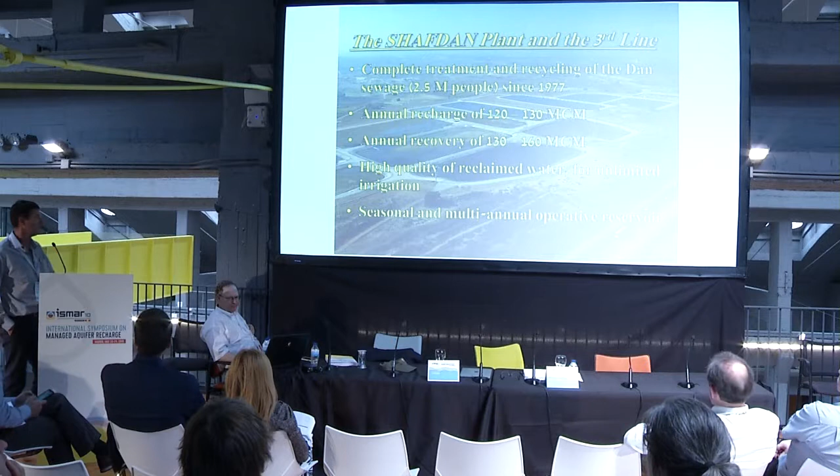We're talking about the Shafdan Plant, which is one of the biggest of its kind in the world, for soil aquifer treatment. For the last more than 40 years, it has delivered complete solutions for all the Dan region sewage, more than 2.5 million people, complete treatment and recycling of sewage, annual recharge of about 120 to 130 million cubic meters, annual recovery of 130 to 160 million cubic meters, a very high quality of reclaimed water for unlimited irrigation. And as we all know, the MAR advantage of a seasonal and multi-annual operative reservoir.

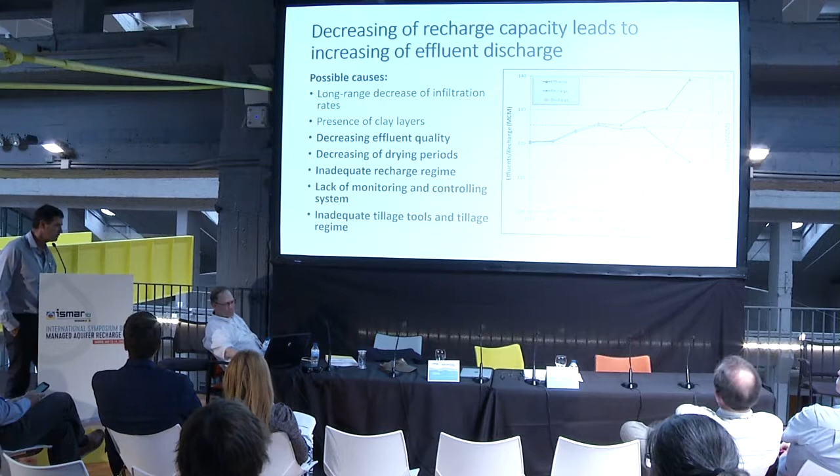I will talk about the tillage—inadequate tillage tools and tillage regime.

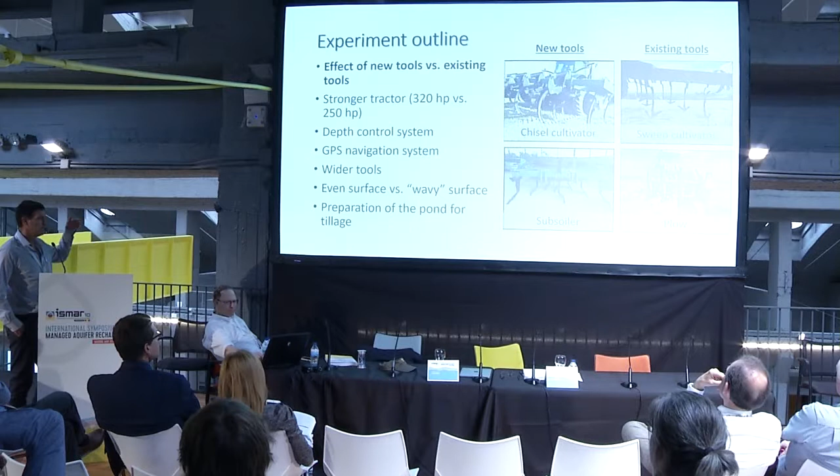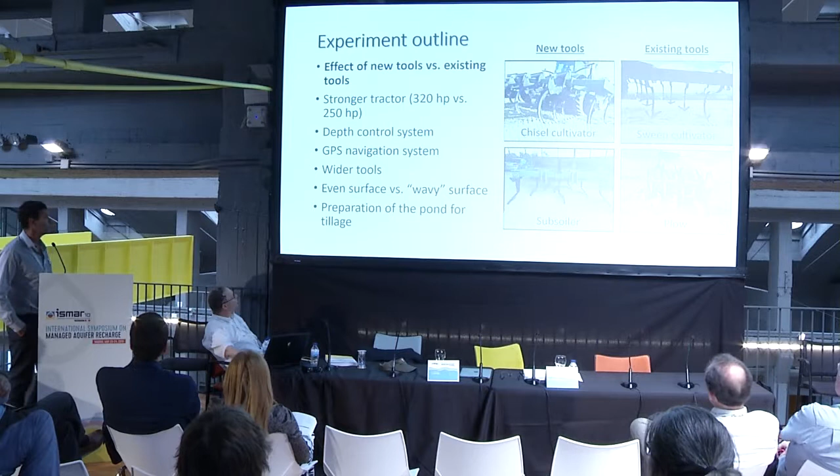We kept the same concept, but decided to change the tool. Instead of a sweep knife cultivator, we moved to a chisel knife cultivator, increasing the depth a bit, from 20 to 30 centimeters. And instead of a plow, we're working with a subsoiler. Besides this, we also decided to check the tractor, using a stronger tractor with control systems such as a depth control system and GPS navigation, and working with wider tools in order to minimize passes over the fields.

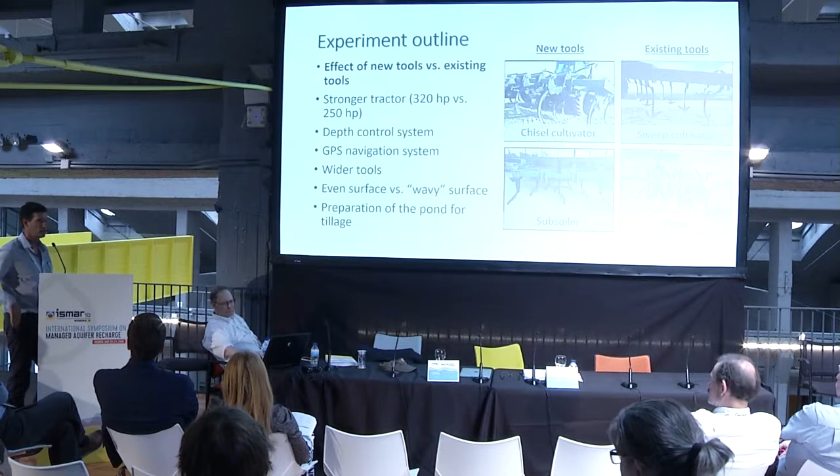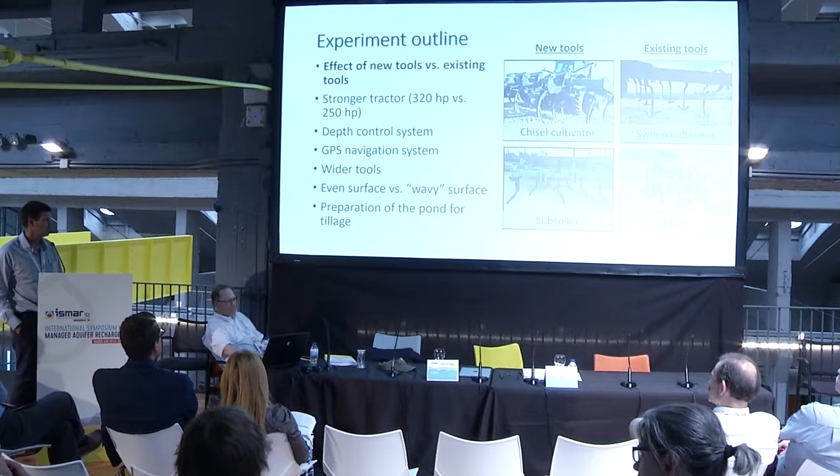One important question is even surface versus wavy surface. I know in many places the recommendation is that the surface of the ponds should be wavy in order to increase surface area, etc. There's an interesting answer to this question at the end. And I think one of the most important things is the right preparation of the ponds before tillage, meaning complete drying.

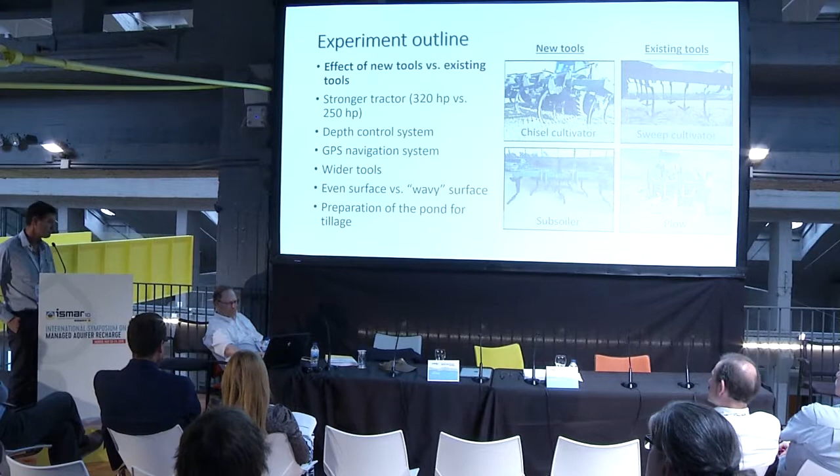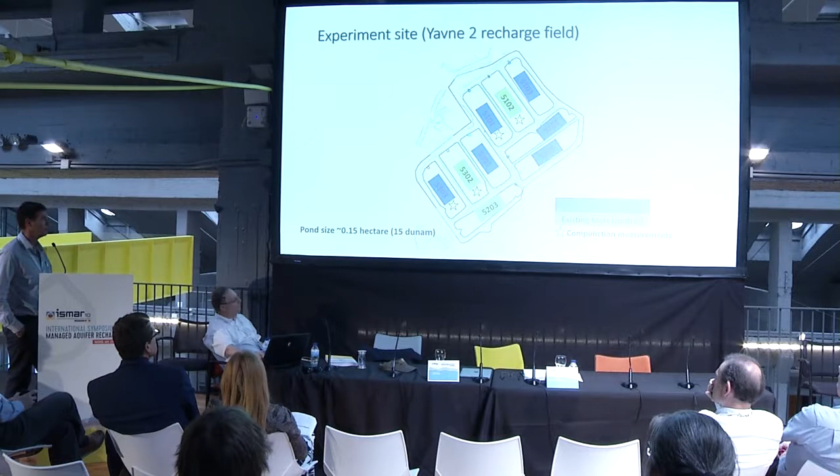In 4 of them—control and treatment—we also ran some soil compaction measurements.

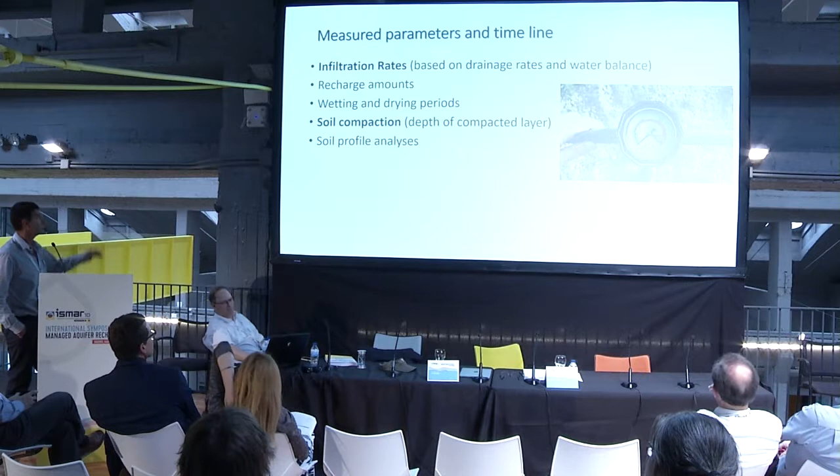These are the measured parameters during the experiments: infiltration rates using 2 different independent methods, recharge amounts, wetting and drying periods (all data that we collected), soil compaction—which is actually the depth of the compacted layer—and soil profile analysis. I bolded the parameters that I will have time to discuss now.

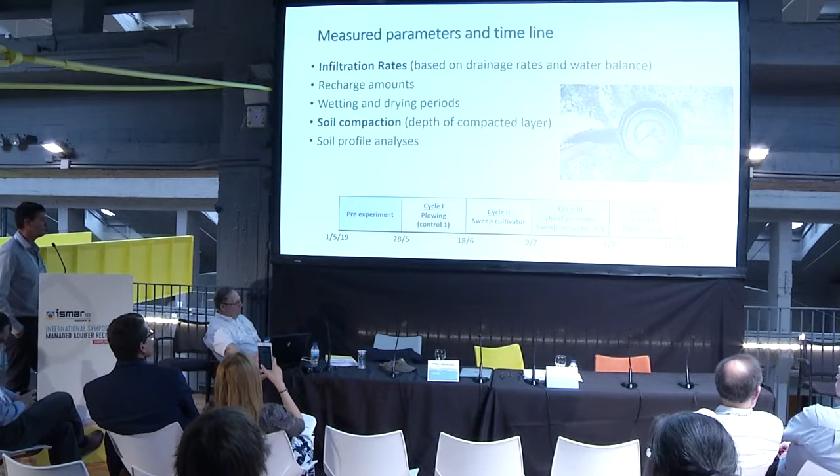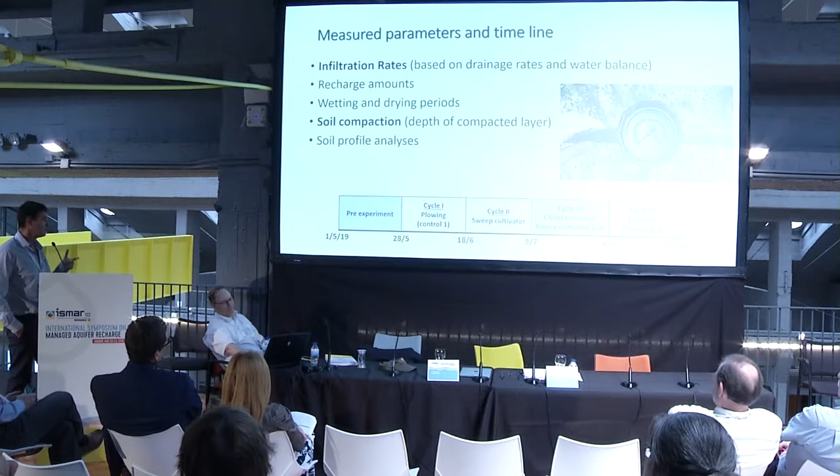The experiment is divided into 4 main cycles with a pre-experiment cycle. It started at the end of May and ended in September, so it's a summer experiment. The first and second cycles are cycles where we used the existing tools—the plowing and the cultivator.

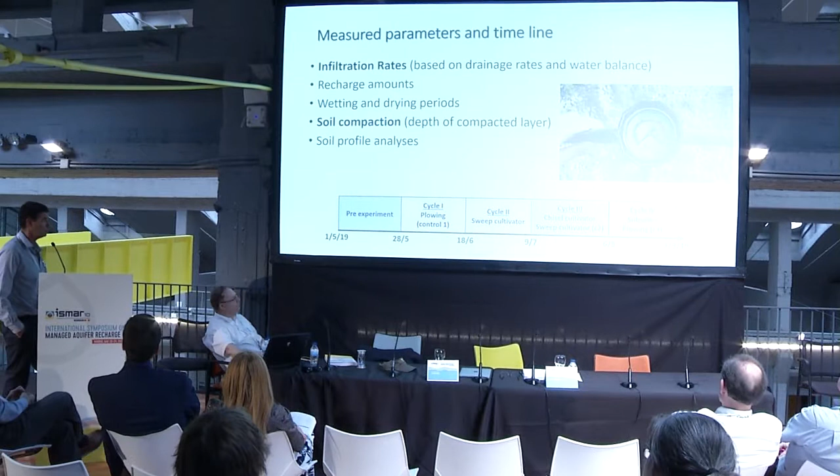And then the next 2 cycles are the ones that we compare between the new tools and the existing tools: first, the chisel cultivator versus the sweep cultivators, and then the subsoilers versus the plowing. We also have a pre-experiment cycle at the beginning of May, where they plow all these ponds without any special instruction from us, just routinely.

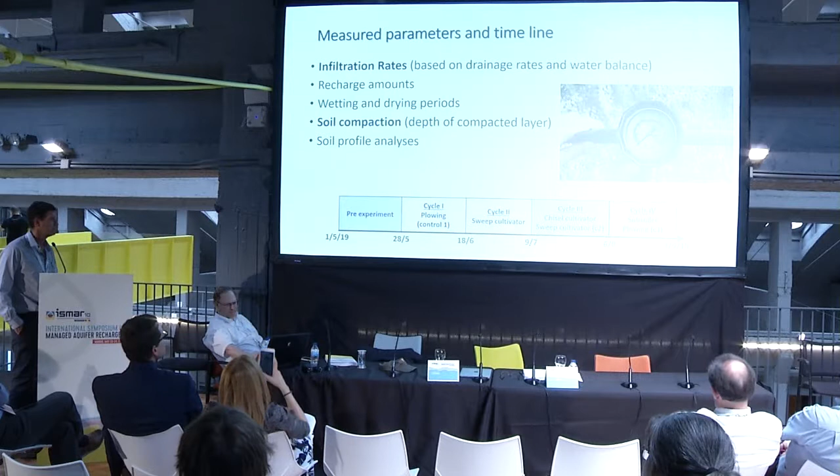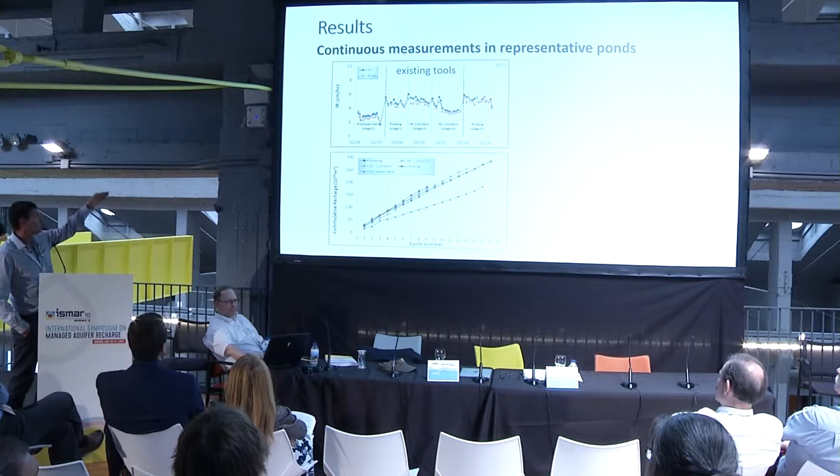So we can also refer to this cycle. These are continuous measurements in representative ponds. I'll just demonstrate the result in 2 ponds for you. One of them is the existing tool, which is the control. What you see is after the pre-treatment season, when we start the experiment with proper preparation of the field.

The plowing dramatically increased the infiltration rates, and then the existing cultivator kept the same infiltration rate. In the second cycle of the cultivator, after about 3 weeks, we see some reduction in infiltration rates, and then another plowing managed to recover the infiltration rates to about the same size as when we started the experiment. On the bottom, you see the amount of the recharge and the rate, which is accumulated.

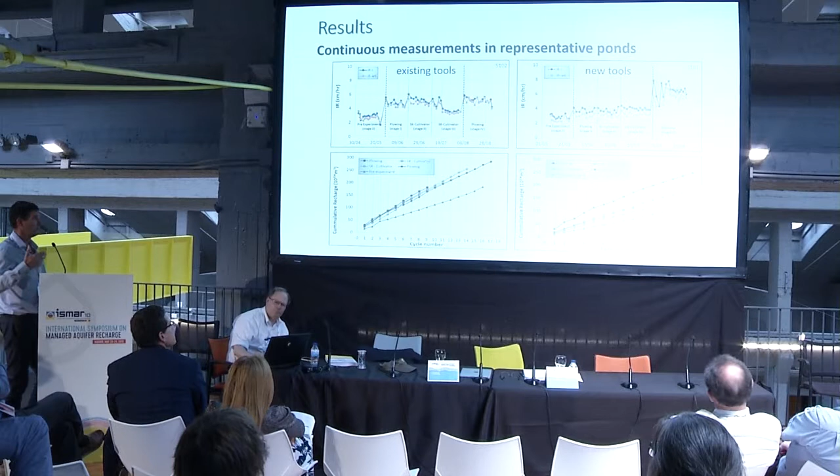Now let's compare it to the effect of the new tools. First of all, the first 3 cycles are about the same because we're using actually the same tools. The differences started in the 3rd cycle, where you see the chisel knife cultivator managed to even increase infiltration rates compared to before—definitely not decrease it like the control ponds.

And the joker is the subsoiler, which dramatically increased the infiltration rates, and you see it also in the rate of the accumulated recharge amount.

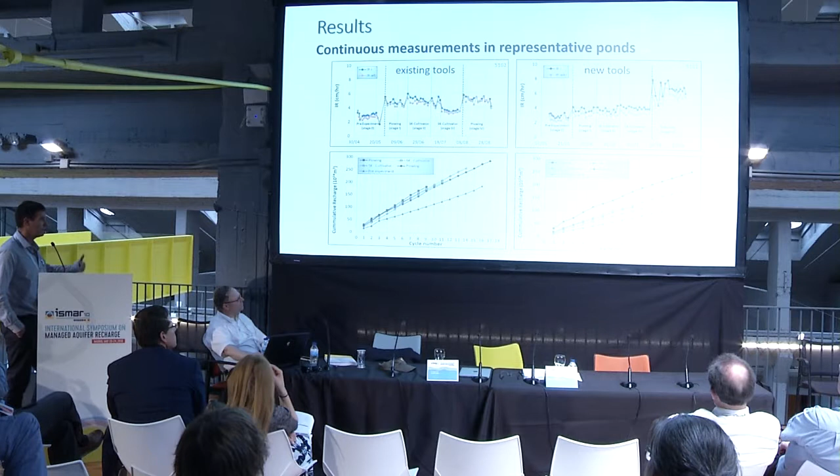In order to summarize all our replicates together, we calculate the relative change in infiltration rate relative to the first plowing. Then we calculate the average, because of environmental variability not all of them act the same. You see the first plowing, of course, is 1 because this is the reference.

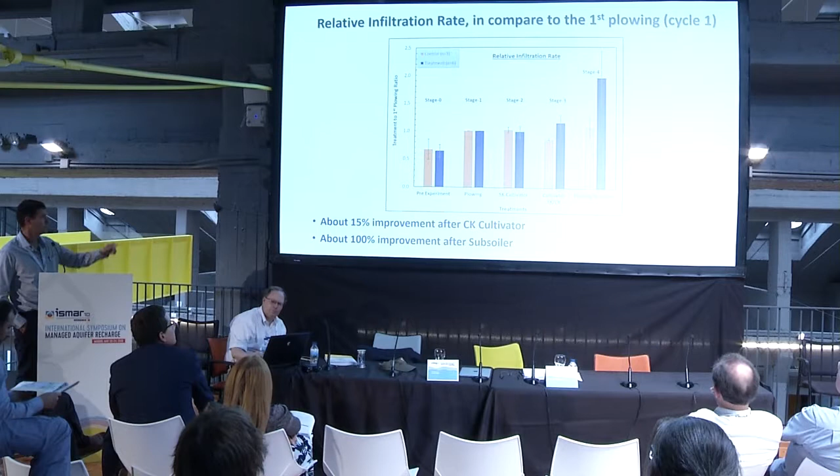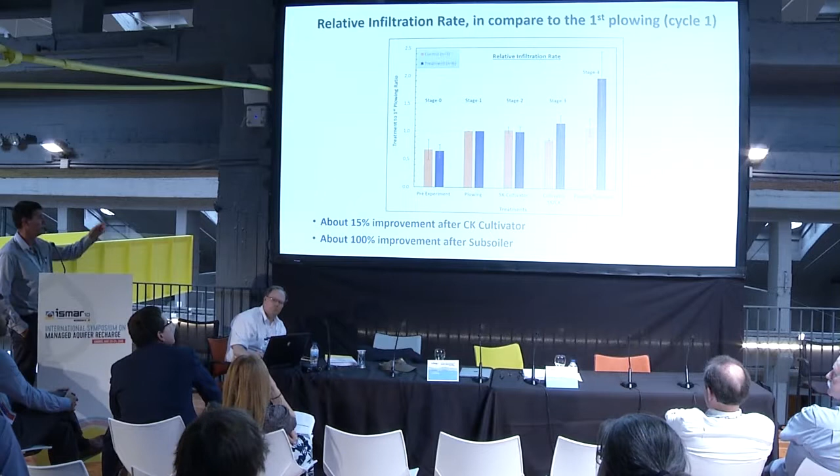The sweep cultivator didn't change a lot in the second cycle. Then from the third cycle, you see the change of the chisel cultivator, which increased the infiltration rate about 15% compared to the first plowing—definitely much more compared to the second cultivator, the existing one. And the result of the subsoiler increased the infiltration rates by about 100% compared to everything.

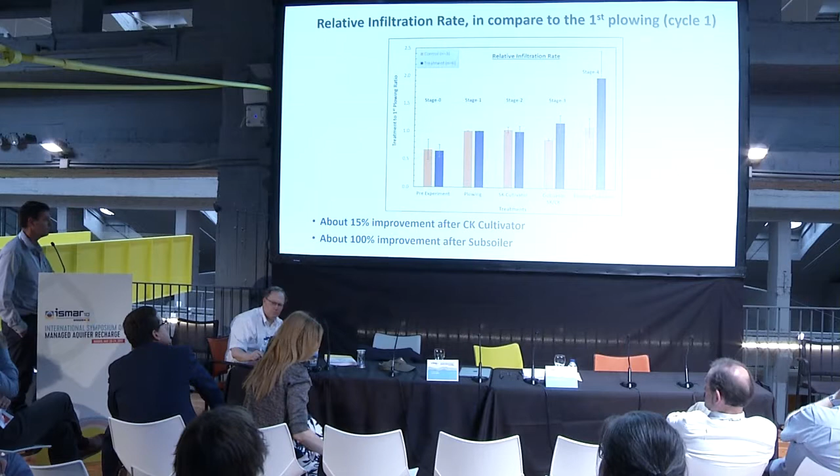So the new tools concept enables us, first, to increase the depth of the compacted layer, or actually to break the compacted layer that was at a depth of 30 centimeters. And second, to increase the uniformity of the field, which leads to more efficient tillage.

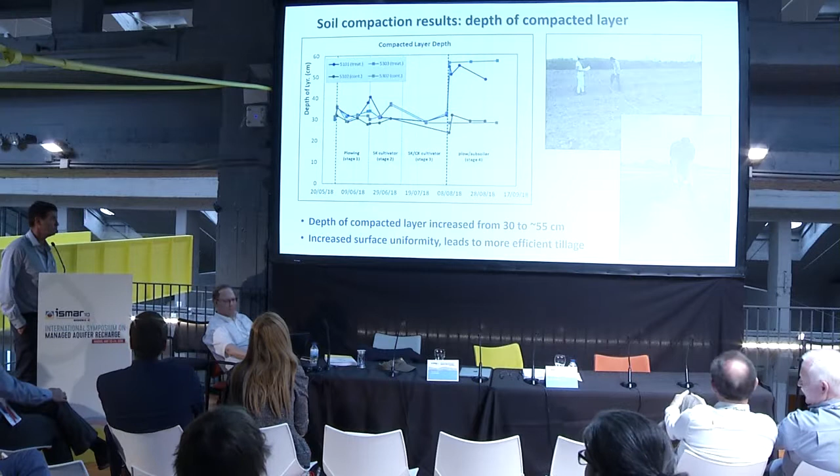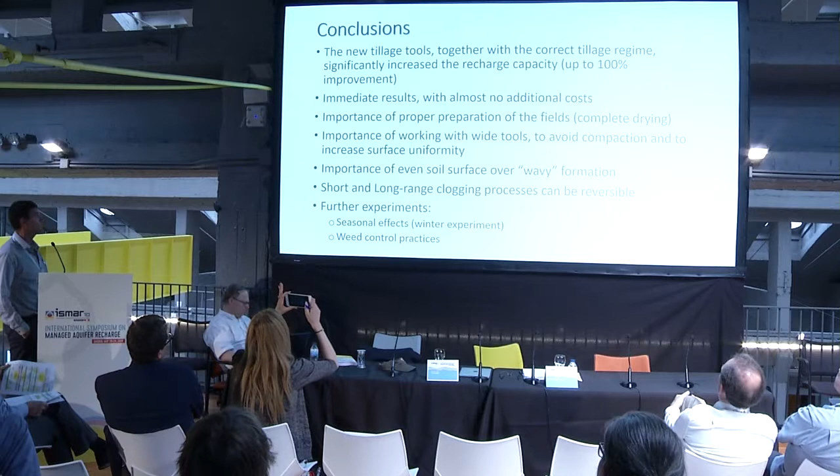So the conclusion: first of all, the new tillage tool together with the correct tillage regime significantly increased the recharge capacity, up to 100% improvement. Results were immediate with almost no additional cost.

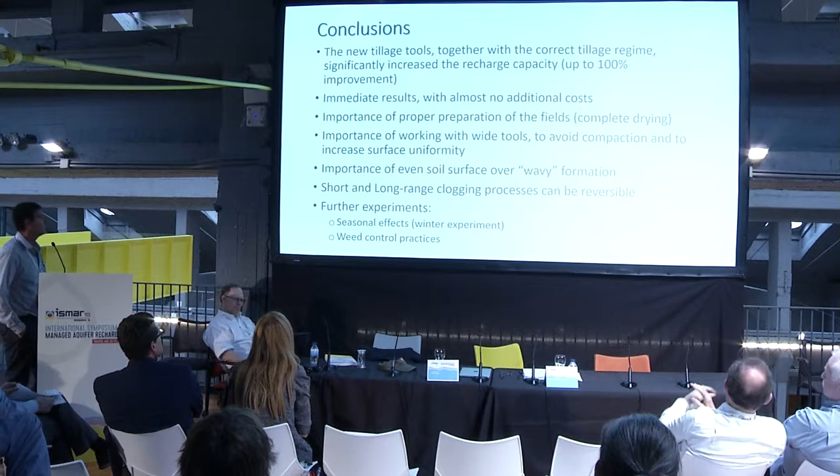I want to emphasize the importance of proper preparation of the fields, mainly complete drying. Even if you should wait 2 or 3 days before it's completely dry, wait—because otherwise the tillage is not efficient.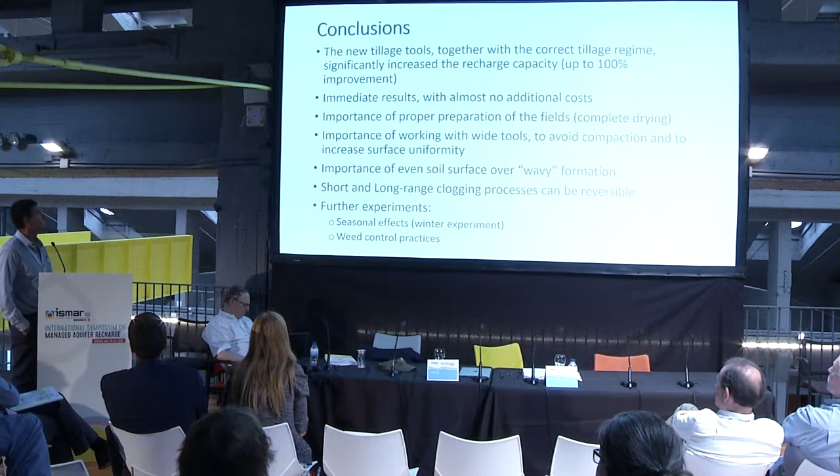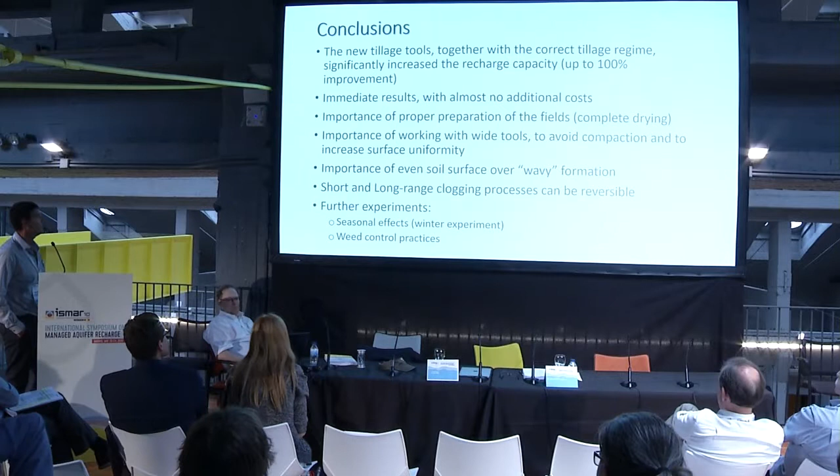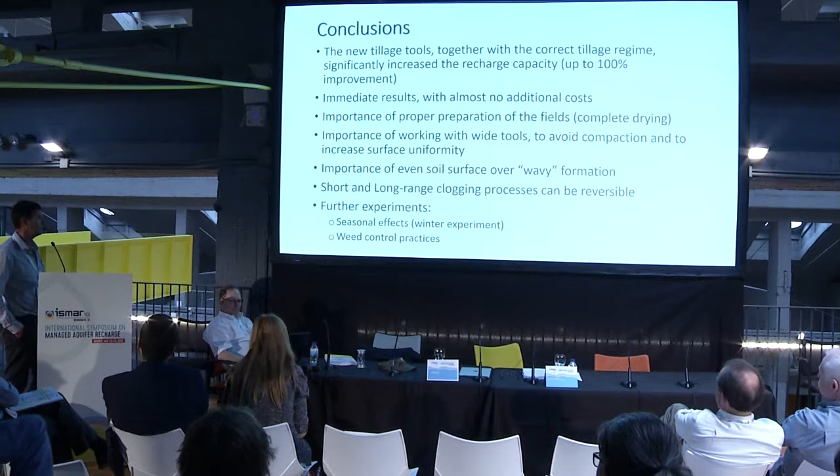Also emphasize the importance of working with wide tools in order to minimize the passes over the fields, to avoid compaction, and to increase surface uniformity. The importance of an even soil surface over the wavy formation, which leads to uneven tillage—this I think is why this wavy formation is not so good, among other reasons which I won't go into now.

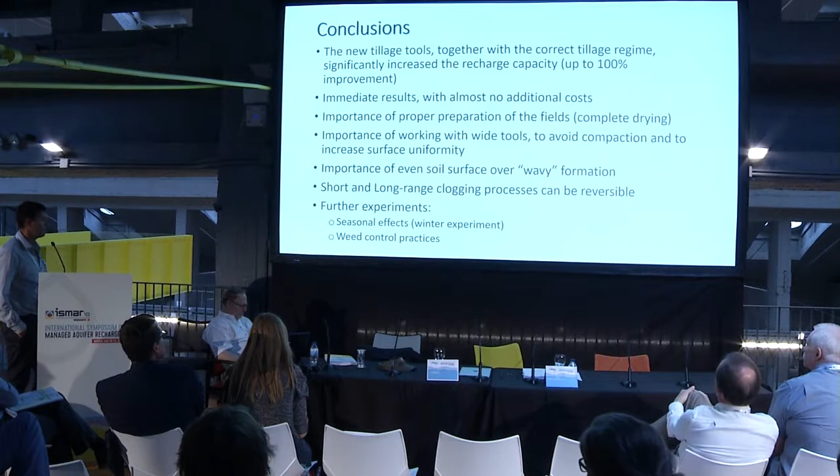I think this is a very important conclusion, at least for me: that short and long range clogging processes can be reversible with the right treatment.

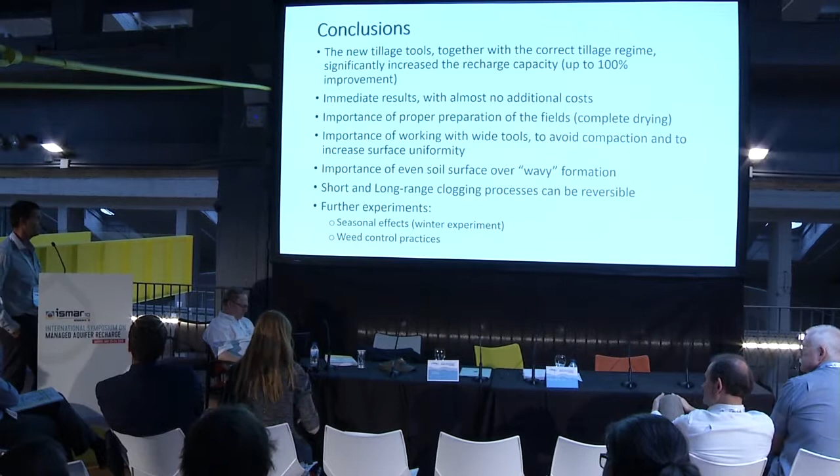Further experiments: seasonal effects, of course, because it was a summer experiment, so we should check it in the winter—which we already did during December until February, and got about the same result. And weed control practices—we should find something more efficient.

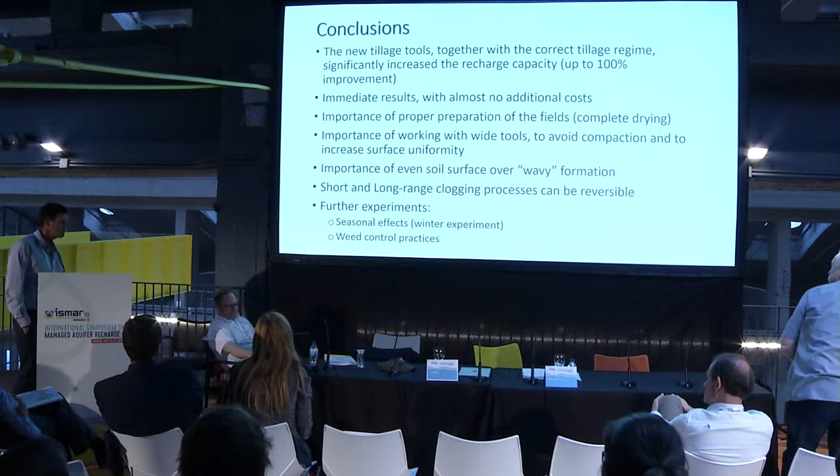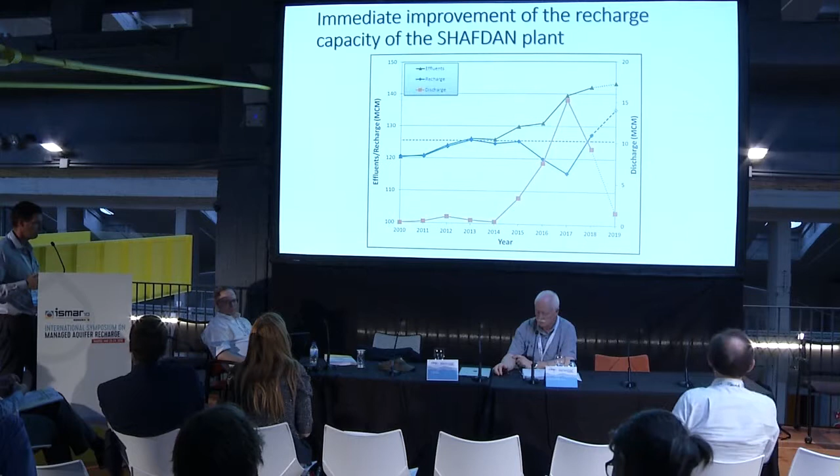Now, if you ask yourself whether we managed to solve the crisis or not, this is the answer. You see at the end of 2017 the height of the discharge, and then at the end of '18, the next year, we finished with the largest amount recharged in the last 10 years—about 127, 12 million above what we recharged the year before. And by the end of 2019, this year, according to results we already have, we expect to finish with almost no discharge, and a recharge of about 135 million cubic meters, which was never recharged before. That's about it. Thank you very much for your attention.

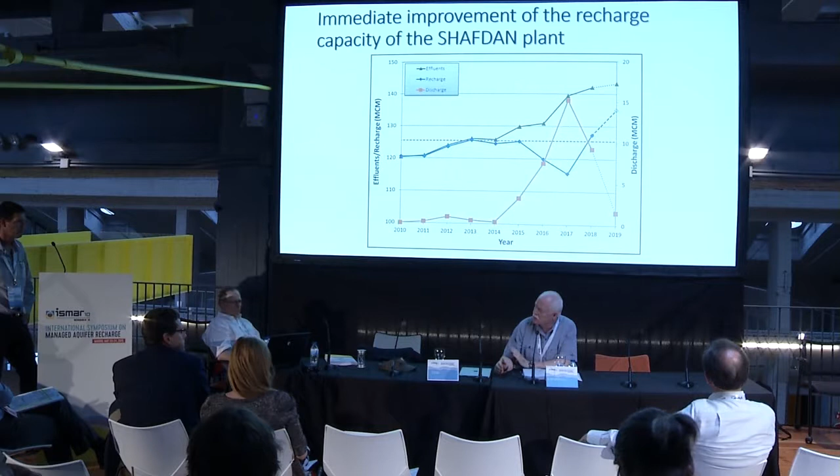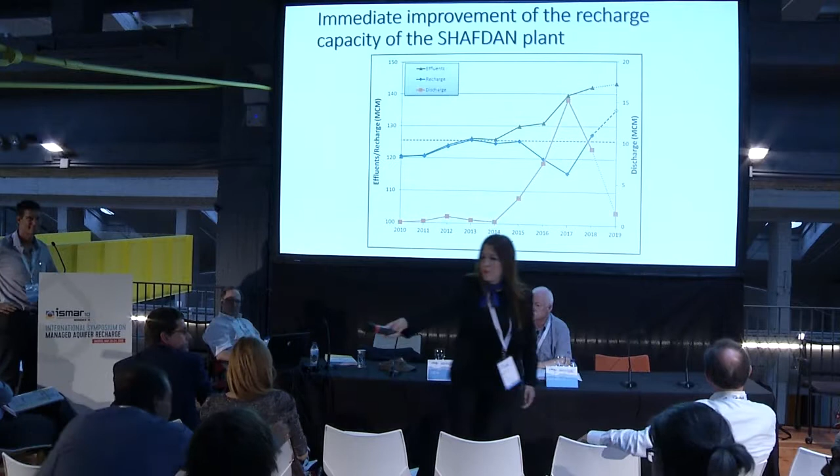Danny. Yeah, what is a subsoiler in comparison to a regular plow?

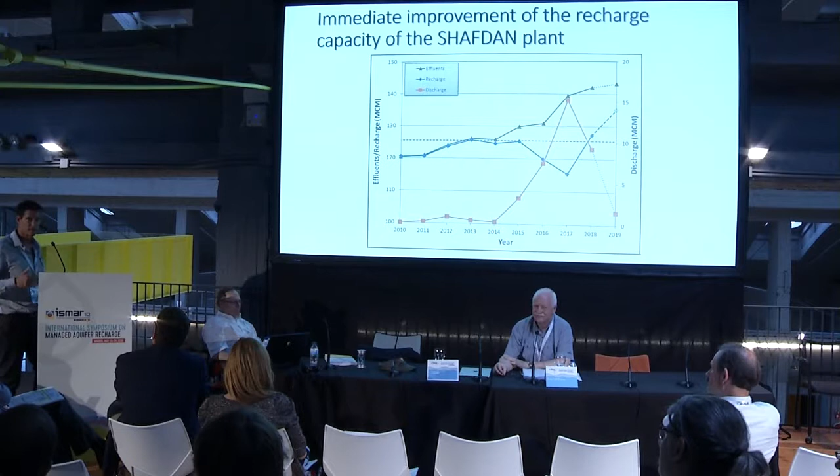A subsoiler, unlike a plow which takes the soil and turns it upside down, goes to a deep layer. I think it also has a very strong compaction effect because it needs to overcome the resistance of the soil at the bottom. The subsoiler just goes underneath to the depth you can define, aerating the underneath layers and breaking compacted layers. We also, because we're working with sand, added knives over the leg of the subsoiler, according to recommendations from farmers who are expert in it, to increase its effect on the subsoil.

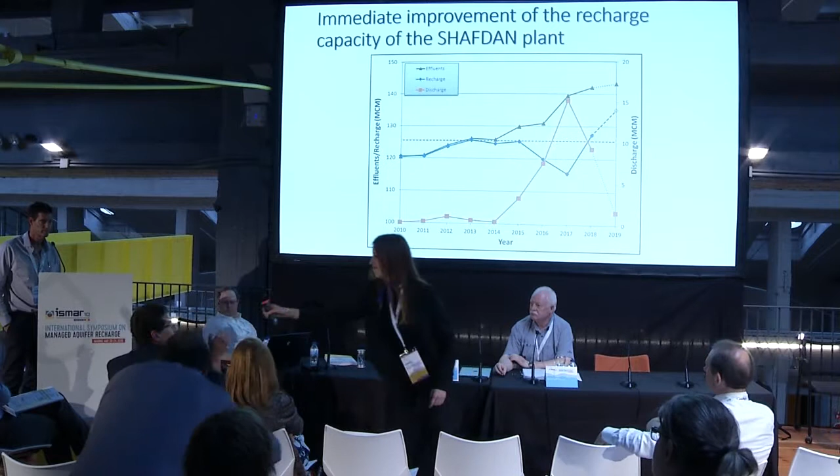Effluents basically contain organic materials, almost no mineral materials, so we're not worried about accumulation of fines in the ponds. What actually happens when you operate the ponds incorrectly, mainly by reducing the time of dryness between wetting cycles, is that you start to accumulate biocrust, which is very hydrophobic and is, I think, the one that creates the clogging effect.

If you let it dry - and that's what I mentioned before, that during the last year we made some major changes all over the plant - even though we had excess effluent, we instructed the people who turn the faucet on and off that when the ponds dry, let them dry for at least 10 to 12 hours. Even if you have excess effluent, throw it away, I don't care, let it dry. When you let it dry and operate correctly, this is, I think, a major key. The tillage is a second key, managing to break a compacted layer that developed over many years due to discs, plowing, and other long-range processes.

And I think there was one question over the back as well, and Peter, you've got a question too. Do you have any thoughts over the longer term, maybe 5, 10, or more years? Will you have to remediate the zone that you till, or do you think you can do this for 20, 30 years? Do you have any feel for the timescale? It's worked for more than 40 years already, 45 years already.

I think when you operate it correctly, we can work at least another 40 years, but it needs to be operated correctly. Sometimes when it works, and it did work in the last 10 years before the crisis, people didn't give attention to it. Even though you offer experiments and everything, they'd say no, it's working, leave it. So I don't see why it won't work in the future.

So your experience is that ridges and furrows do not work, because that was proposed at ISMAR in Adelaide as a means to reduce clogging in basins. And now you demonstrate - well, it was not your intention to demonstrate that, but your findings indicate - that it would be counterproductive to have ridges and furrows. Can you comment a little bit more on that?

Yeah, I can. We had an argument about it before. Many favor plowing or other methods that create furrows and ridges and say that's recommended. I was against it because what you actually see in the field is that in the furrows you get accumulation because it's a little bit shaded, and you see accumulation of crust there, accumulation of organic matter, and development of crust. So the mechanism of increasing surface area on one end and infiltration in the furrow while letting air out at the ridges just doesn't work. On the other end, when the soil surface is uneven like that and you want to till, the tractor isn't even - one knife is in the air, one knife is very deep, and it's just very superficial work. That's how I explain it.